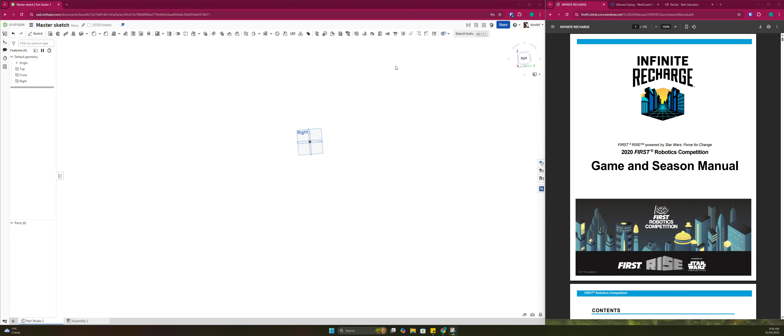Hello, welcome to a video where I or another mentor will be teaching you how to CAD in Onshape, and CAD specifically FRC mechanisms. I'm Tal. I'm a mentor for ICRobotics. I graduated in 2021 and I've been mentoring since 2023, so around 2 years now.

In this first video, I'm going to go through how to make a master sketch, which determines the points of where our intake wheels are going to be, as well as our pivot. You can also include things like motor location, though I don't think we'll do that for this one because we don't know much about the rest of the robot. So I don't know. We'll see.

I'll give you a quick example of what we'll actually be designing. We'll be making a slapdown intake, which means that it's driven by a motor or a pneumatic cylinder, but for this one we're going to be driving it with a motor. You can see in this one, for example, you have your pivot point here, and that's where this whole intake arm pivots around. So it can come down. When it comes down, that's when the game piece is picked up, or we say intake.

Maybe this is a nice GIF. Yeah, exactly like that, right? Picks up the game piece into the robot.

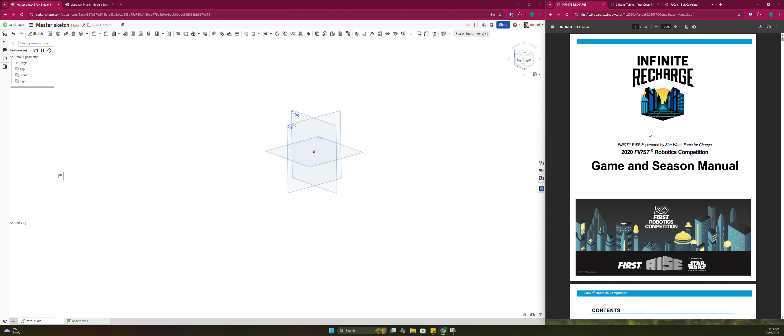We'll be making an intake for the 2020 game. I just picked a random game. You can make an intake for any game. There's always a game piece that sits out on the field that you need to pick up. So in the 2020 game, you had to pick up these foam balls. They were effectively dodgeballs, and you had to shoot them into a goal. We won't be focusing on the shooting thing. We'll be focusing on the intake.

So, like I said, this is the game piece for the 2020 game. We called it a power cell. Power cell is a yellow 7-inch diameter, medium bounce Dino-Skin foam ball.

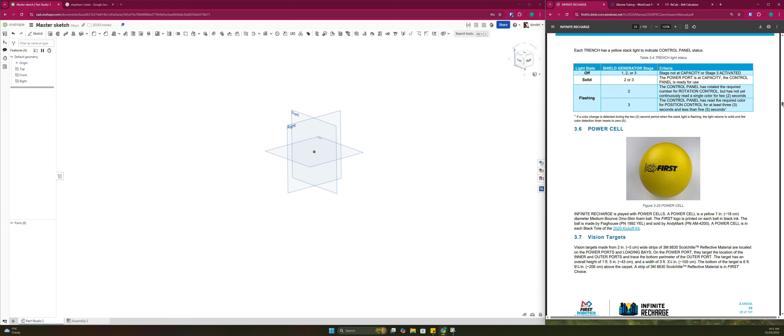One thing I will mention is every single year there's something called the game manual, this guy here, and it tells you everything you need to know about the game. It tells you rules on what robots can and can't do, rules on how to construct a robot, dimensions of the field. So it'll go through, this is this tall, whatever, and it'll tell you about the game piece. So that's what we're concerned about today. What we'll also be concerned about is the bumpers, and you'll see why later, as in the bumper construction rules.

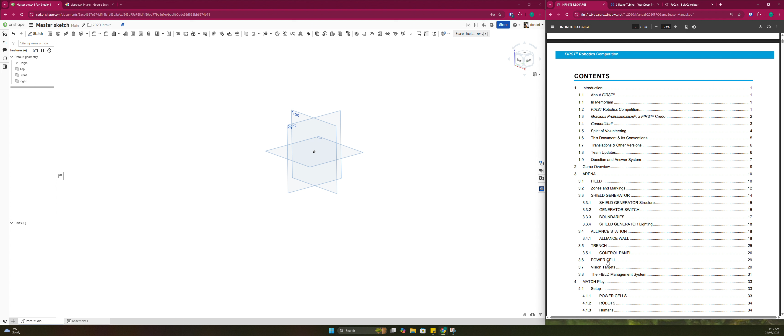So I'll go back to the power cell. Okay, so it's a 7-inch ball. Cool. So now that we know that, we can go back to our sketch. We'll start a new sketch by clicking here, right? And I'm going to start on the right plane. After you've done that, you can click N to set your view normal to the plane. You can also click up here, but I just find N a bit nicer.

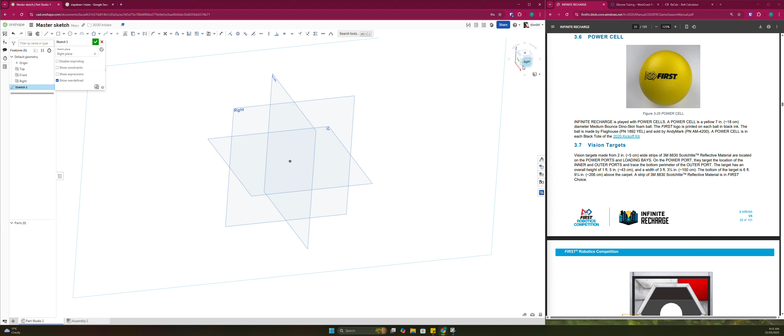After you've done that, we should draw our bumpers, right? So we're making a sketch of partially the robot, the part of the robot that the intake is going to interact with, as well as how the intake is going to interact with the ball. And you'll see what I mean by that in a second.

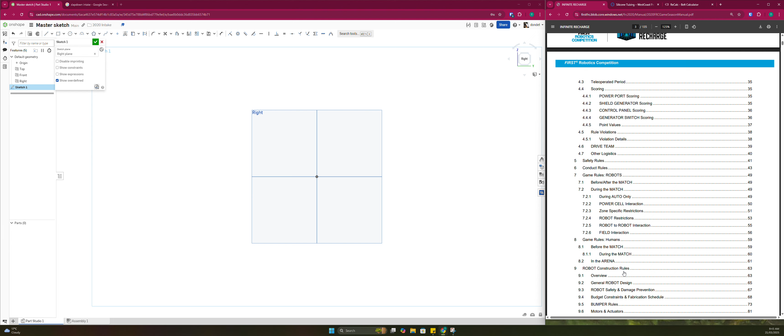But anyway, we go to robot construction rules here, bumper rules. It's in the game manual every single year, so it shouldn't be too hard to find. So the cross section of the bumpers looks like this. It's two pool noodles stacked up together with the plywood backing. So that's cool.

What we'll do is draw that up now. This cross section, right? So it's always good to constrain things off planes or the origin because these will never ever move no matter what. Nobody can change them.

You could go and come into the sketch and fat finger some dimension or I don't know what, and then it changes your whole robot CAD and you don't know what changed and what went wrong. So we should always constrain things, and the best things to constrain to are the origin and the planes you see here, right? Additionally, because this is gonna be a master sketch, it's just gonna define the important points in our intake on a 2D plane.

We're not planning on extruding this. So I'm going to make everything a construction line. You can do that by clicking on the line and then clicking up here, construction Q, right? Or you can click on the line and then click the Q button on your keyboard. You can also, before you draw the line, click Q and draw the line, right? And it makes a construction line. But anyway,

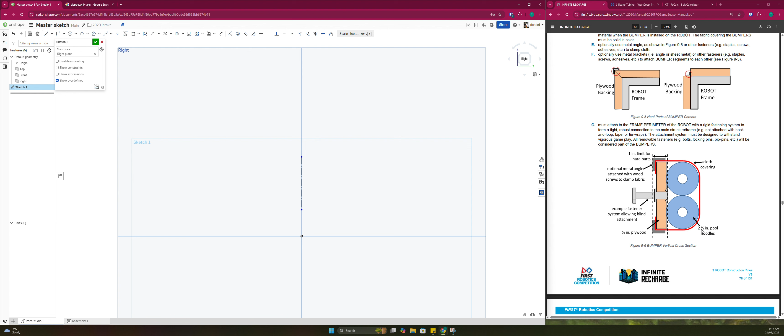so that's going to be 2.5 inch pool noodles in diameter stacked up together. So I'll click D for dimension. You should always dimension things when you can, for the reason I said before. So that's 2.5 inch, and we've got two of them stacked up together, right? So that's going to be around that big. 2.5 inches. Okay, so we've got that.

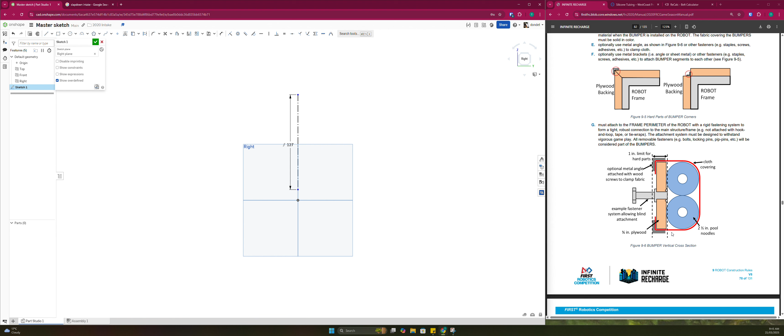Then it comes back and hits a plywood backing, right? So we've got this one, and we've got this one, and construction line. These two, currently they're not in line, but they should be, like these 2 points. So I'm going to use the vertical constraint. That's this guy up here. You can also click V. What the vertical constraint does is it constrains one or more lines or a set of points to be vertical. So when we click on points, it'll make these two in line with each other vertically, right?

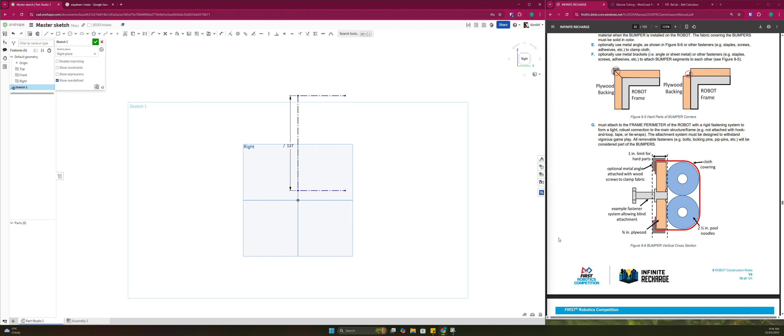So once I've done that, I can set the length of those. They're going to be the diameter of a single pool noodle plus the thickness of the plywood. So the diameter of a pool noodle is 2.5 inch, plus the thickness of the plywood, which is 3/4 inch, just like that.

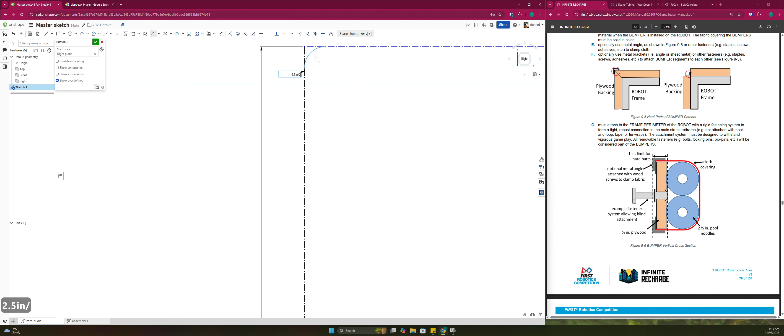We probably also want to put in the radius of our bumper. We can do that using a sketch fillet. It creates fillets or rounds by selecting 2 sketch entities or a point. So in this case, we can click on these points, or we can click on these 2, right? But I'll do a point, 1, 2, and we set the size using this R number. It's a 2.5 diameter pool noodle, which means it's 2.5 inch divided by 2, because we're setting a radius. You can see here it's R 31.75 radius.

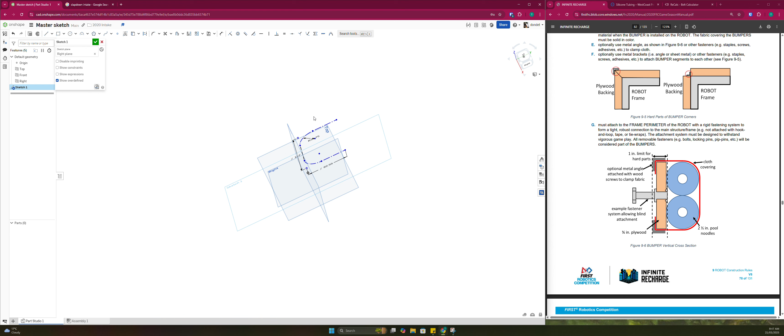The last thing that we'll do is, you can still see that this can move vertically. We're going to pretend that this top plane is our floor, and we'll just say that. Okay, I got a bit interrupted there. I don't remember where I was at, but yeah, it can still move in the vertical direction.

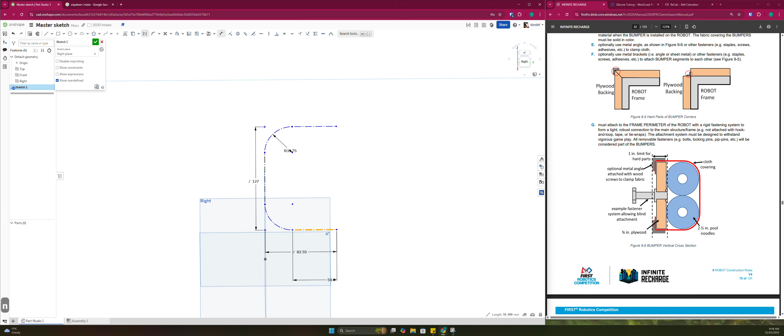We're going to pretend that this top plane is our floor. So I'm going to dimension the bottom of the bumpers to our floor. Can we do that? No. Worth a try. Yeah, like that. Okay. Let's say our bumpers are going to be, I don't know, 20 mil off the ground. Keep in mind that all these units are in millimeters. That's what we tend to use when we design parts.

Okay, cool. So we've drawn up our bumpers, and the frame will kind of be like, I've just clicked on the rectangle function, the frame will kind of be like this, right? Actually, I'll make this a construction. Frame will kind of be like this. And frame is always going to be 50 mil because we buy 50 by 25 box tube, right? Cool. So now, what's next?

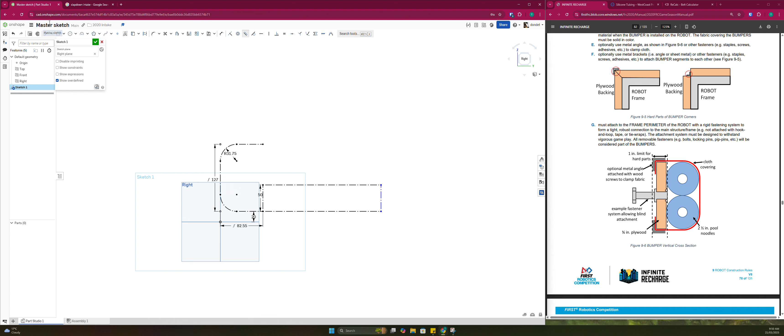We need to map the trajectory, how we want the ball, the game piece, to come up and into our robot, right? Because all of these rollers do something. They play a part in bringing the ball in. So we need to map how it's going to interact with the rollers. The ball initially is going to be right up against the bumpers, right? Construction, needs to be 7 inches in width. It's going to be right up against the bumpers.

Now, how do we get it to be right up against the bumpers? We can use the tangent function. The tangent function makes a tangent relation between two sketch entities, or between a sketch entity and a plane. Perfect. We're going to do both of those. We're going to make the ball tangent to our bumpers because it's going to hit our bumpers when it comes up. And we're also going to make it tangent to the floor because obviously it's going to be sitting on the floor before we pick it up. So that's the first state of our ball. Then it's going to move up and into our robot. So we need to draw another circle, keeping in mind that you're still using construction lines.

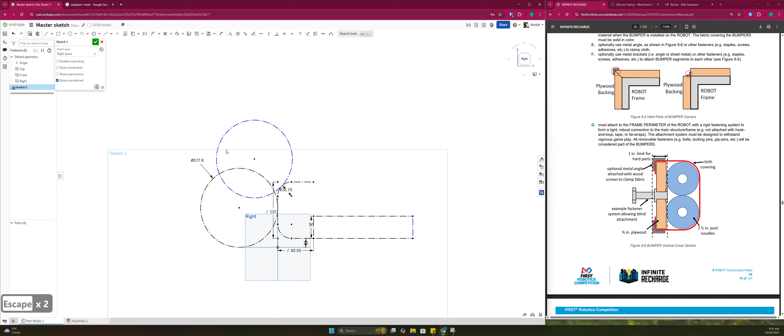For this, I'm going to use a tangent constraint, an equal constraint, so that I don't have to use this dimension again. That way, if for some reason I want to change this number, I can just change one dimension and they'll both change. I'll demonstrate that. So the equal dimensions just go here. I click E to set it. Make those two equal, right? And now if I make this 8 inches, they both change in size.

You want to have meaningful dimensions, so your dimensions need to have some kind of purpose and be easy to understand by, let's say, yourself looking at this a week later when you don't remember what exactly you've done, or another person, for example. And you want those dimensions to be meaningful because if you make a drastic change, it'll update the CAD correctly and it won't break anything.

So the next point I wanted to sit at, let's say over here, right? We'll make a tangent to the bumpers again. Keep in mind the bumpers are compressible, so you might not get the ball acting how you want when you come up, but this is something that you discover when you prototype your intake, right?

The next one is going to be sitting on top of our robot. Again, making it equal to the original, because if I made those two equal and I deleted the middle circle for whatever reason, that's going to lose its equal constraint. So we'll just dimension it to the original, future-proof it. Again, we'll make that tangent, right? So the ball is going to be moving something like this, right? Something like that.

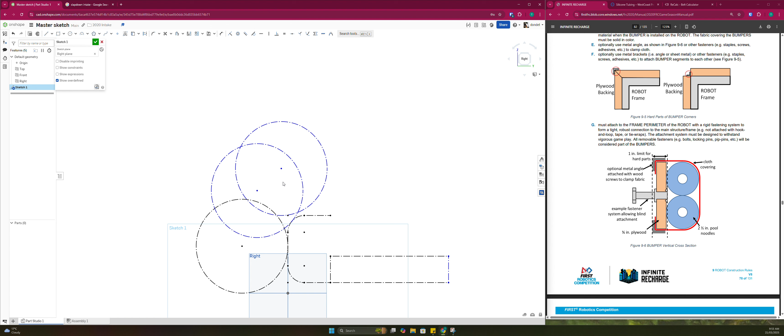What I'll do is, we have to get rid of the blue lines. Pretty much what black means is fully defined. I can't drag it around, right? What blue means is it's not defined. I can still drag it around, but I want it to be set because this is going to determine the position of our intake rollers, right?

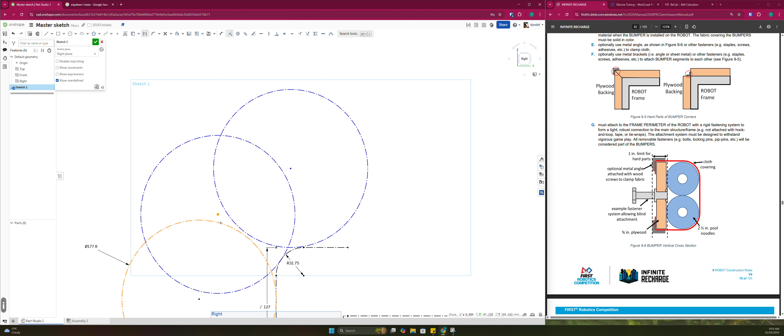You can constrain this as long as it's in the general area that you want. You can constrain this however. I'm going to constrain this guy. I'll constrain those two together, and I'll constrain this guy to this guy, right? So our ball is going to be moving up and into our robot just like that, right? Actually, I don't quite like how I've done that, but it's not too bad.

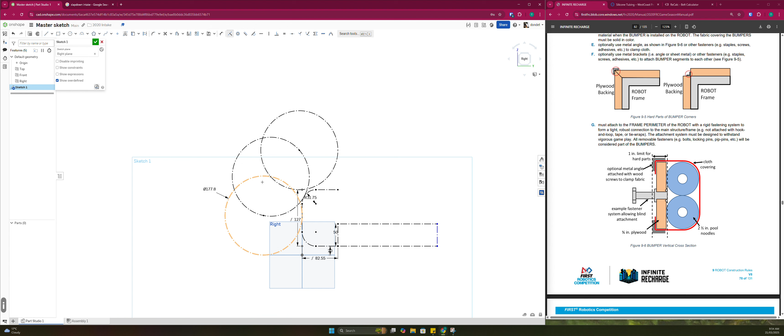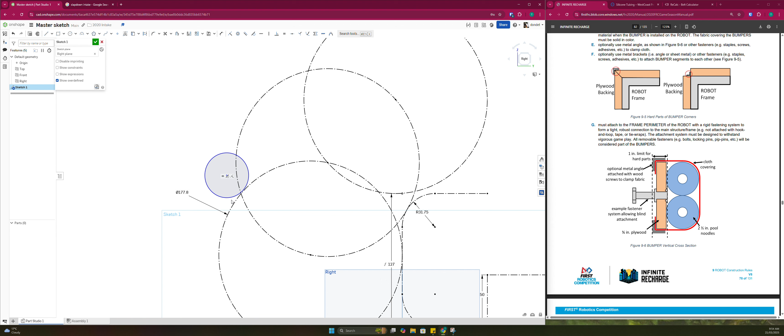Okay. So our first roller will have to capture the ball, right? So, see, that's an issue, right? The ball is going to get caught. So let's say around here. Keep in mind the ball is compressible, so we can still bring the roller inside of the ball in some sense, right? Something like that. That's going to be the position of our first roller.

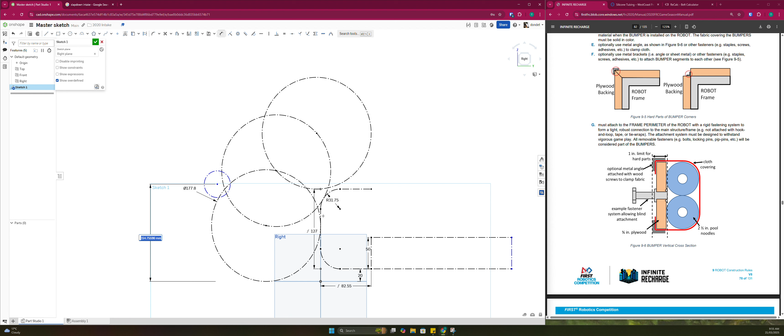You can dimension this in multiple ways. You can dimension it based off compression, like that. In this case, I'm just going to make it easy for editing later, and I'll dimension the position based off the planes that we know. So what was that? 154.75. We're always going to make that a nice round number, just so we don't have a lot of decimals everywhere. And it's still unconstrained in that direction. So again, I'm going to constrain off the origin. That's going to be 170, right? Cool.

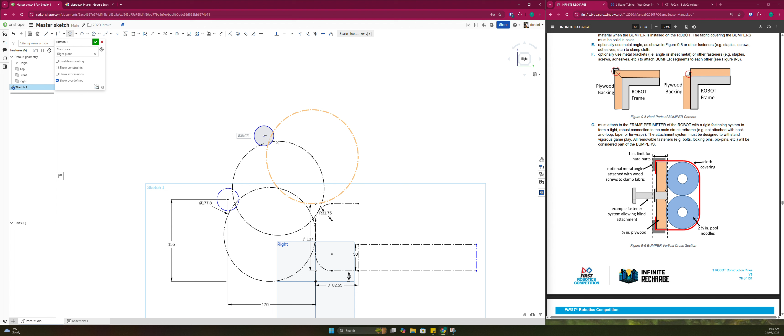The next position I'll probably want is something like that, right? Again, construction line. Oh, I should dimension the diameter of this guy. So how do we know the diameter of our roller? In this case, because our game piece is very compliant, it's a foam ball, I'm going to be using a hard roller.

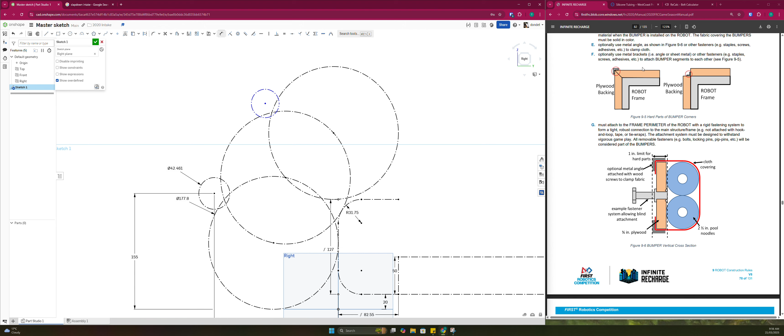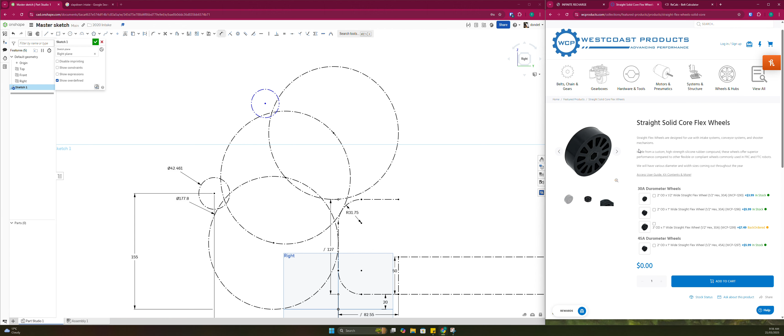There's different types of rollers. You've got hard rollers, soft rollers, and compliant rollers. So this would be like a compliant roller. They're very grippy. They squish, but we tend to use them more for game pieces that aren't compliant. For example, this year in 2025, we had a game piece that was just a PVC tube, like a cylinder. It was very hard, so it wasn't compliant at all, implying that if you were going to build an intake, you were going to use something like a compliant wheel, like this one. But because we've got a compliant game piece here, we're going to be using something harder.

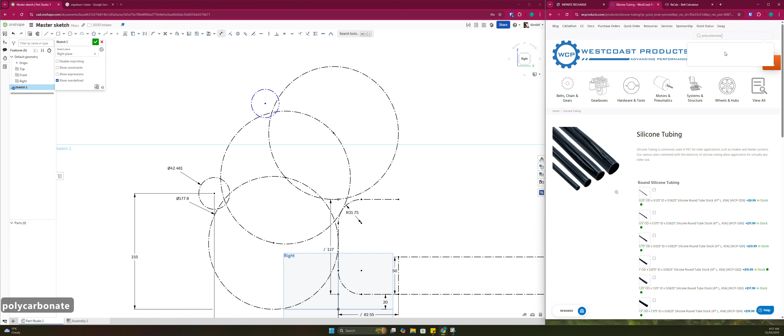So a nice thing that came up in the recent games is silicone tubing. This silicone tubing wraps around some harder material. You could use some thin aluminium, or polycarb tube, or carbon fiber. They come in all these different sizes, and they're supposed to be stretched over. So I don't know how much you can trust this OD. We'll have to look into it. You can see there's a lot of different options, so anything will work. Do they sell?

No, they don't. Okay, no worries. Let's just pretend that we've got a 1.25-inch diameter roller, right? Like that. So you can see we still have to adjust that guy. So he just needs to come down under 150.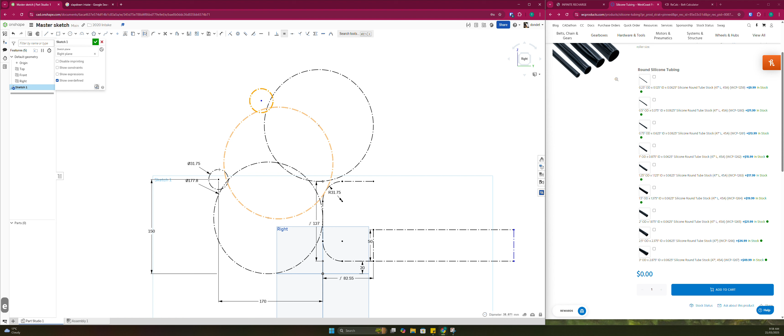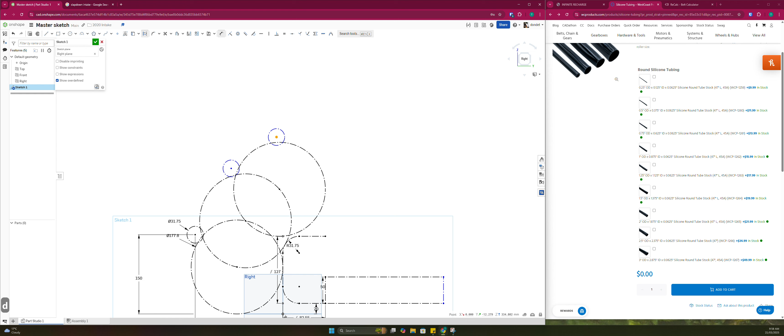Sick. Again, make those two equal, and I guess we can make a third roller that sits up here and finishes driving it into the robot. Make these two guys equal. Make him a construction line. Cool. He needs dimensions on him. So does the other one that we drew before, actually. That can be 335. That one.

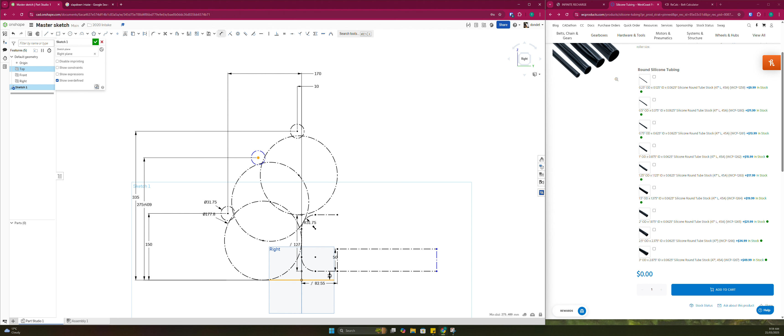Oh yeah, I don't like that. No, I don't know. That can sit there. You want to keep it somewhat organized for editing later. He needs something there. 275, right? There's not much compression there. We might bring that down to 272 maybe. Looking a bit better. Like I said, you need to prototype this and figure out how much compression is the correct amount. That can be ended off to exactly 100.

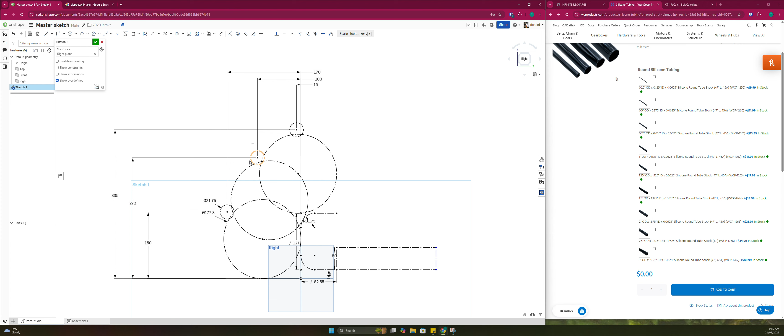Oh, I forgot something. These need to be distanced off each other because you can see, like in these intakes, let's say this one for example, each roller has a belt coming off it between the two. That's how they're driven. We're gonna have the same, and those belts come in. If I look at, we use HTD belt, right?

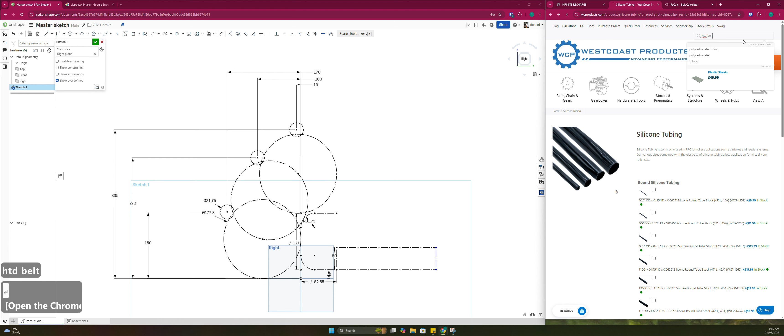If we look at belts, they come in very specific sizes. You can see increment by 5. Sometimes you get these weird sizes, but mostly they increment by 5 teeth, implying that the center distances between our wheels need to be somewhat set. They're not just whatever number we want them to be.

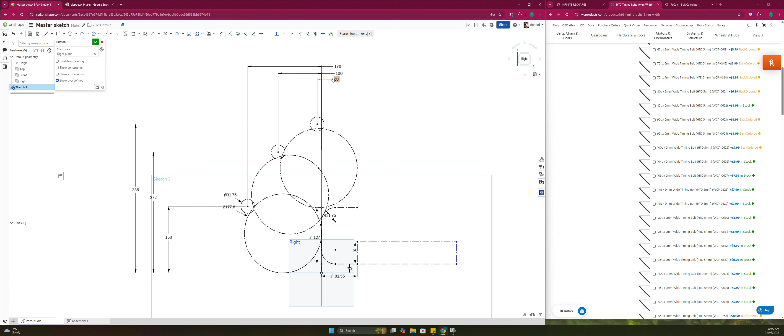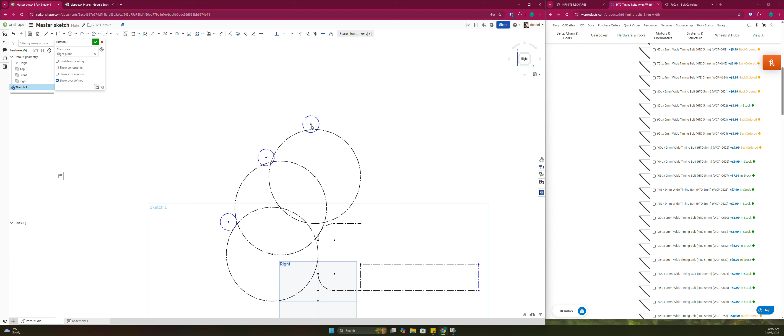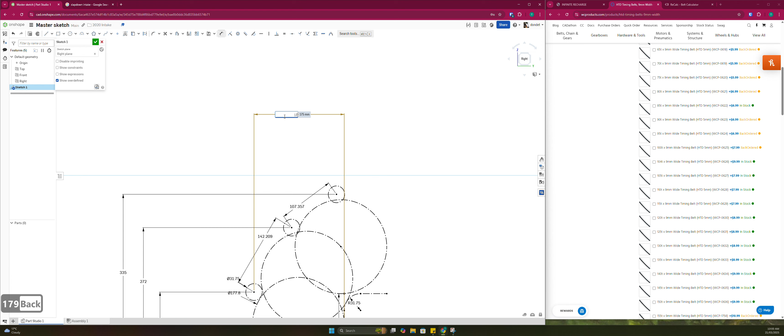So I'm going to get rid of these to give our rollers a bit of a degree of freedom, right? Put it around where I want, and then I'll dimension it off each other, right? Same for this one here. See? They can move in that direction. So what I'll do is I'll leave one of the dimensions. 175. No, not good. 170. Yeah, cool. Now I'll adjust these to be correct.

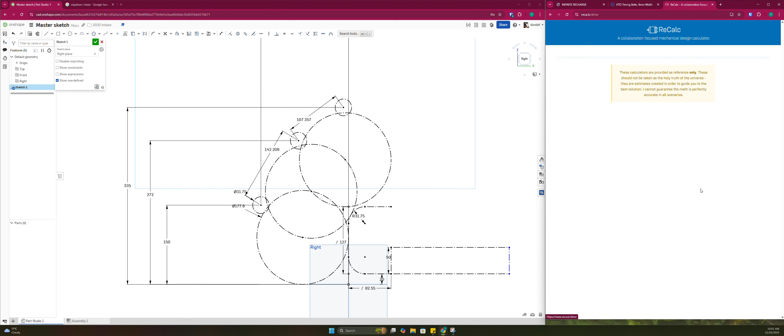So the way that we can do that is we go to this website, ReCalc. This is a website that calculates how far your chain sprockets need to be, your belt sprockets. It tells you how fast your drive base will be if you give it 4 motors, this reduction, and it weighs this much, that kind of stuff. It's a really nice website. Highly recommend using it. But for this, we're going to use the belt calculator.

We're going to look at what we want. So we've got a target center of 142.2 millimeters, right? Our teeth. So in terms of teeth, how do we know what we're going to use? Well, we can look at the standard sizes. Our intake might be hex driven, it might be driven by something else. What I mean by hex driven is we use a lot of hex shaped shaft. So I'll show you what I mean by that.

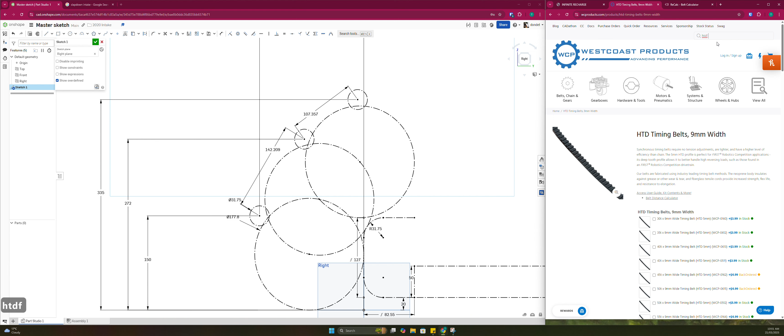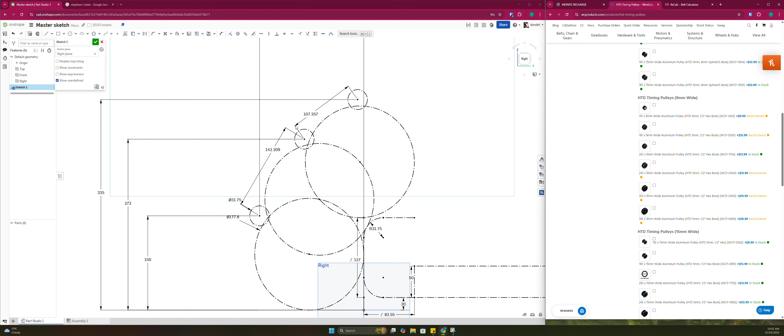HTD pulley, HTD timing pulley. You can see you've got a hex shaped hole, right? So if we go to the HTD timing pulleys, the smallest hex one is 15 tooth. That looks good, though we don't have much of those in the workshop, so we're just going to go straight to the 18 tooth, right? So we've got an 18 tooth on this wheel here, to 18 tooth on the next wheel, and now it's given us all those different suggestions, right?

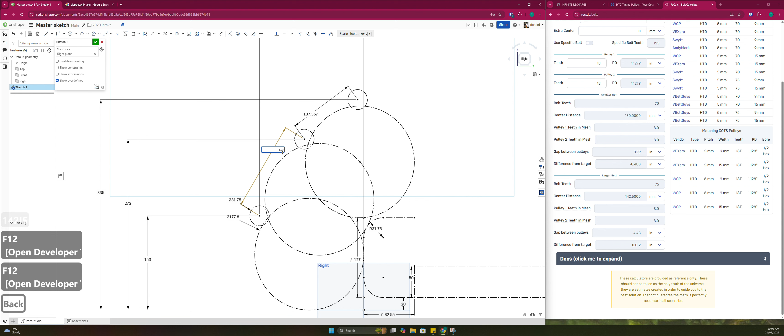We can see it's suggesting a belt with 70 teeth. It's got a 130 millimeter center distance. Not quite what we want because we want 142. See what the next suggestion is. 142.5 millimeters. That's perfect. So we'll change this to 142.5. And what I like to do, right, just so that we still have this page, it's a pretty nice page.

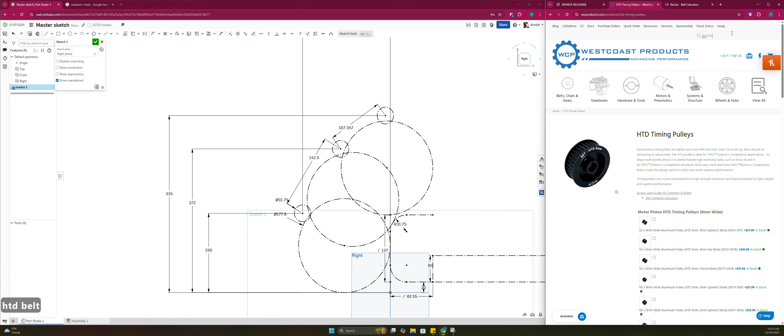You can see all these vendors, they sell, what do we want? 75. Whatever. I would hope that it would show 75 because it's close to what I asked for, but it doesn't matter. We can see WCP should sell a 75 tooth belt. Right, this guy here. It's back ordered, but I wouldn't worry about that. We can buy them locally. It's a bit more expensive, but we can buy them locally. Cool. So 75 tooth belt, that's correct.

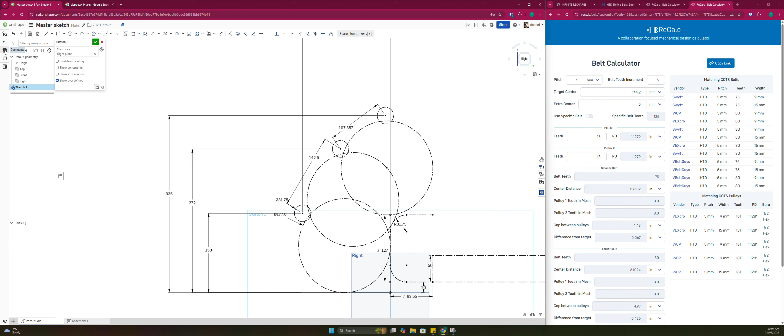What I like to do is I like to copy the link, and that will just give you the link of all this data, and I'll go into the comments. I'll go markup, draw an arrow to this dimension, tick, and I'll put in the ReCalc link so that later I can come back to it if I want. I don't have to look back at what I did before. So we can do the same thing for this one. So we'll probably have the same number of teeth.

You might want to run different rollers faster or slower. I don't know. Like I said, depends on what you've prototyped. But you can change the number of teeth here to include a ratio, right? Right now we just have a 1-to-1 between each roller. So for the next one, we want something that's closer to 107.357.

So the closest one to that is probably that one. Yeah, it's 105. So we'll change this to 105. Oops, I'm not supposed to do that. 105. Perfect.

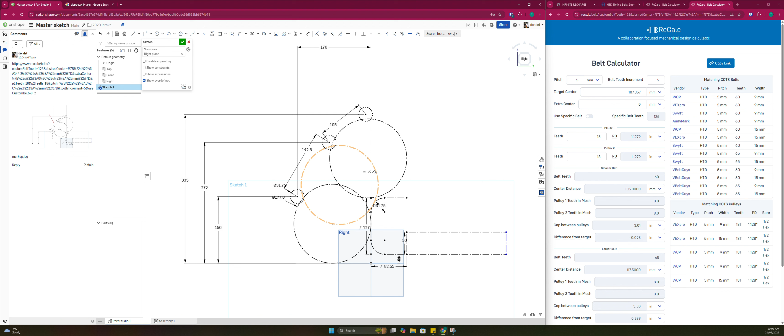Yep. So now that we've done that, we can do the same thing with recalc. I'll make a new comment. Markup. Point at this dimension. Tick. Right. Now we can figure out where our pivot point is going to be.

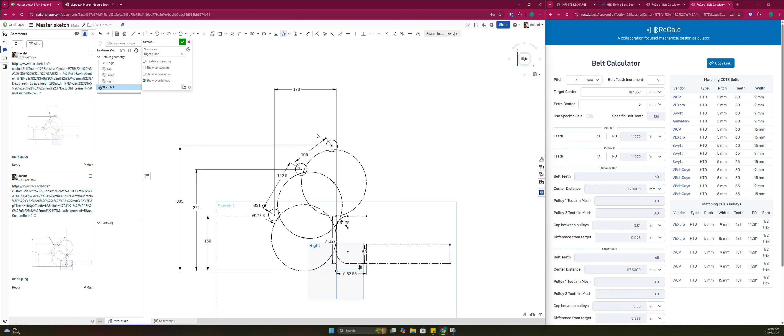So the way that we can do that, right, is we use the circular pattern tool. Because we've got a pivot point, everything is going to be rotating around a single point, which means that it's effectively going to be rotating in a circle. So the circular pattern tool, we can click on 1, 2, 3 rollers, right? We only need 2 of these.

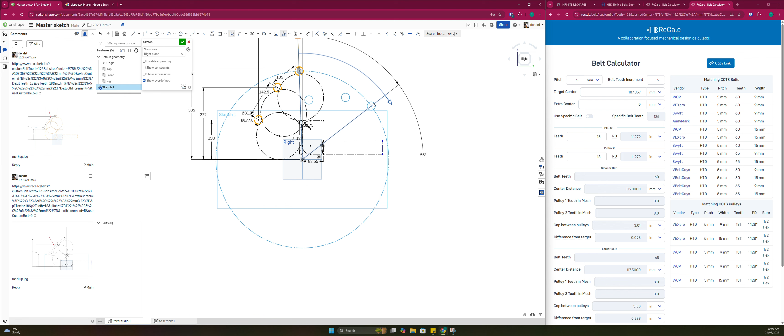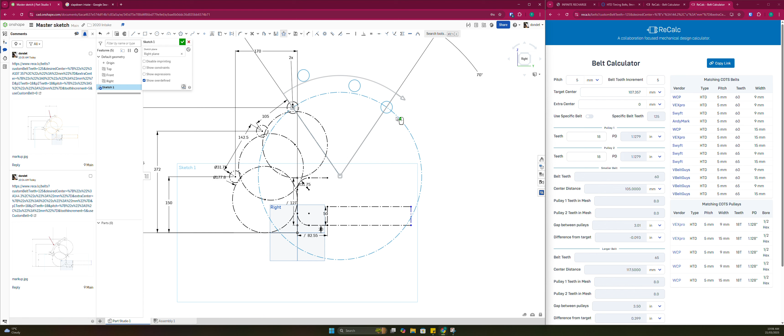And you can see here, when we move the pivot point, this whole thing moves, right? So let's say we have the pivot point there. I don't know, whatever. We'll tick this now and we'll play with it, right? So we can adjust our pivot point.

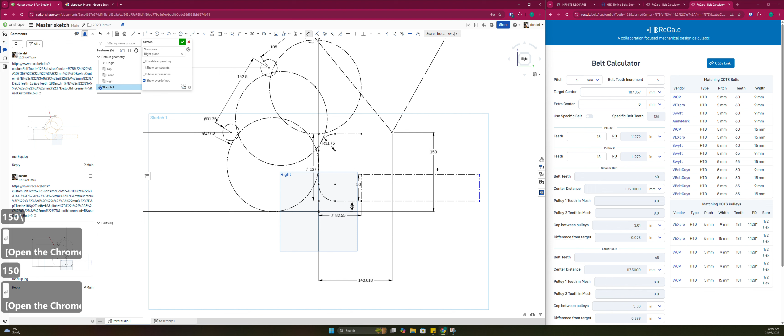I'll constrain that off the origin again, because the origin is always the best thing to constrain off. Not always actually, but in this case it's not bad because nothing will break in the future. You can be guaranteed of that if you constrain off the origin.

So yeah, what we're looking at here is when our intake retracts. Actually, this is not the best way to do it because we want to dimension, you know, where this front roller is going to be when the intake is retracted. Because essentially, when the intake is retracted, it needs to fit within the frame perimeter, which is this line here, right? It's that line.

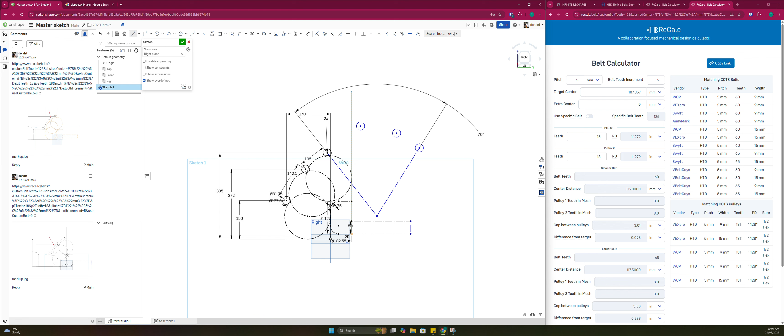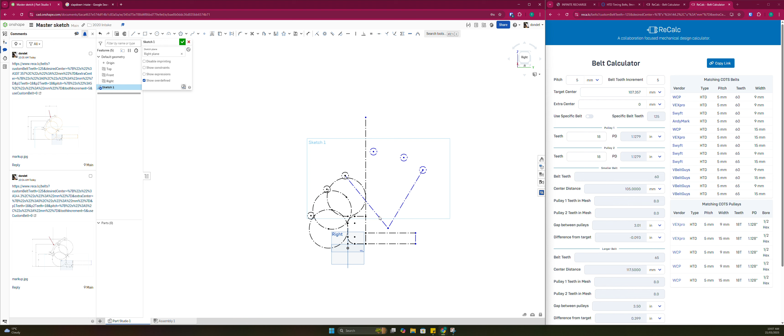So what we're going to do is we're going to dimension this to be, I don't know, 20 mil off. You might want more, just so the refs aren't suspicious that our robot is sitting outside of the frame perimeter when we drive around. I mean our intake, but I'm just going to do 20 for now. And now we can play with this number, right? So depending on where we put our pivot point, it'll just go up like that.

So that's cool. We can also change this angle, you know, bring it back a little more. If we rotate 90 degrees, that looks okay. Constrain off the origin. 170. So yeah, now we can see that's kind of the whole master sketch, right?

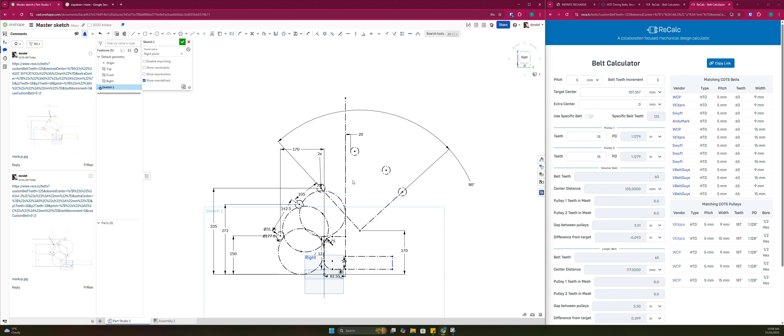When the intake is out, it's going to be sitting like this, and it's going to drive into the balls like that. You might actually have an issue there where the ball can't come in, right? Because it needs to go under this roller. The intake might need to come up to let it in. Like I said, these are points that you'll find out when you prototype your intake.

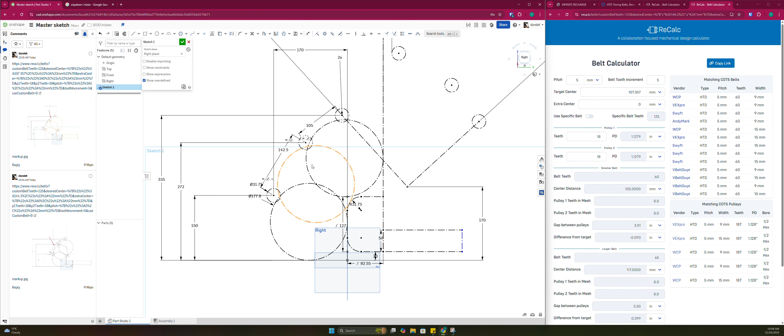But essentially, we've got our rollers in position. The ball is going to come up this way. Once the ball is in, our intake is going to be retracted, and all the rollers are going to sit in these positions, right? Additionally, we've also figured out where our pivot point is going to be. So our pivot point, what we can do now is dimension. These are driven dimensions, so they're not actually going to be doing anything.

But essentially, our pivot point is going to be 53.875 millimeters away from our bumper horizontally, and it's going to be 100 mil off of our frame. So then you can use that to position it. I guess actually you wouldn't, because you would have this sketch in your CAD later. But what was I saying? Yeah, you can kind of see where that pivot point is.

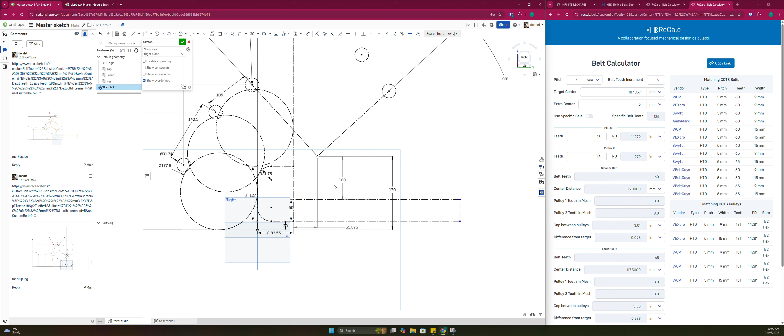And if you're not happy with how things are sitting, you can play with this. You can play with this angle, 110. So it sits a bit further back. Where's our pivot point? Now it's outside of our bumpers. So we would need to move this, right? But now it's a bit high. You kind of want to keep your center of gravity low. So a high pivot point is not optimal. So we'll set that back to 90.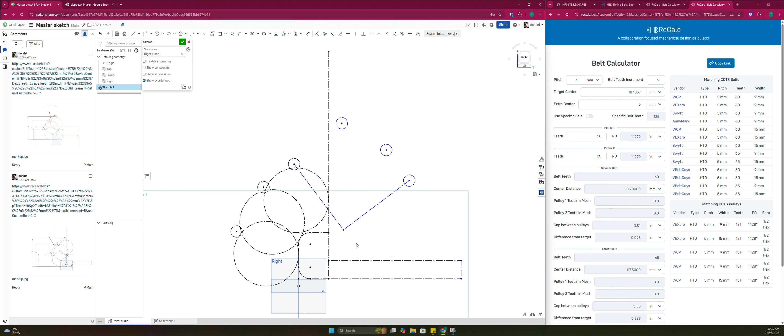You kind of need to balance it, because a nice thing about having it at a high angle is now your intake rollers don't take up as much space in your robot. You can see if I set it to 90, they come out a bit further. But anyway, we'll bring that down there and dimension it like that, 150. So yeah, hope you learned something from that.

In the next video, we'll be starting off our sketches for the ones that we extrude for the intake. And then after that, we'll be assembling it.